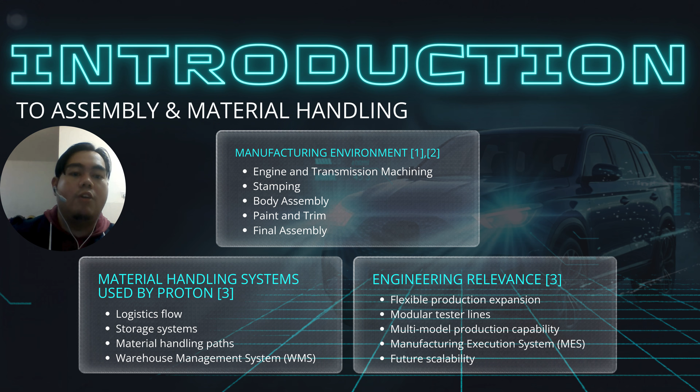Proton Tanjung Malim plant represents the physical automation environment of our case study. The facility consists of several manufacturing stages, including engine and transmission machining, stamping, body assembly, paint and trim, and final assembly. To support this operation, the plant incorporates optimized logistic flow, storage system, and material handling paths. The facility is also designed for scalable and flexible production through modular manufacturing lines and digital systems such as MES and WMS, making it a suitable example of a modern automotive manufacturing environment.

This slide explains the engineering fundamentals that enable automation in Proton's manufacturing environment. First, physical motion is generated by actuators such as electric motors, servo drives, and robotic mechanisms, which are used to move vehicle bodies, components, and production equipment. To control this movement, sensors are used to detect conditions such as position, presence, speed, or distance.

The sensor data is then sent to a controller which processes the information and determines the appropriate action based on predefined control logic. For example, when a vehicle body reaches a workstation, a sensor detects its position and sends a signal to a controller. The controller then stops the conveyor and allows the next assembly operation to begin.

Finally, a feedback loop ensures that the system operates accurately and reliably. The controller continuously compares the actual system condition with the desired condition and makes correction when necessary. This principle of motion control, sensing, control logic, and feedback forms the foundation of automated assembly and material handling systems used in modern automotive manufacturing.

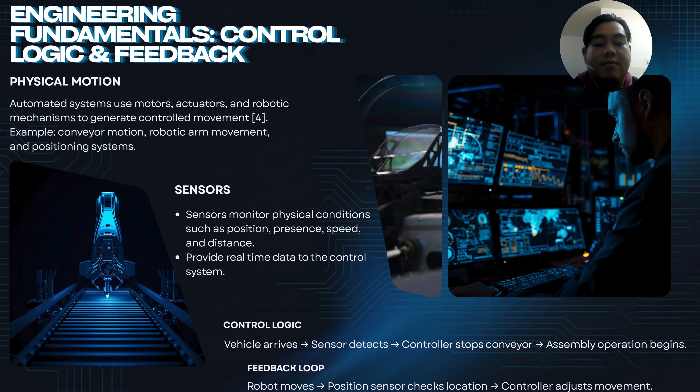This case study focuses on Proton Tanjung Malim manufacturing facility and its use of CIM integration to support automotive production. The engineering challenge extends beyond simply manufacturing vehicles. Proton must simultaneously improve production efficiency, maintain product quality, optimize material flow, enhance worker safety, and support sustainable manufacturing practice. These objectives often create conflicting requirements such as increasing production speed while maintaining safety and sustainability standards. Because the problem involves multiple constraints, stakeholders, and possible solutions, it qualifies as a broadly defined engineering problem.

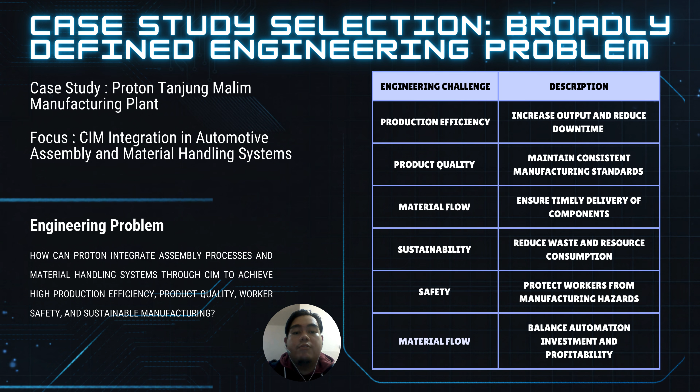The assembly process in Proton's manufacturing system follows a structured sequence beginning with body assembly, followed by painting, trim installation, and final assembly. From an automation perspective, the process relies on sequential operation where each stage must be completed before the next stage can begin.

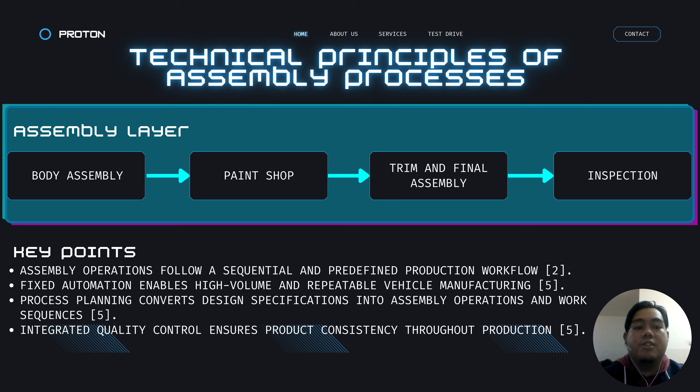The manufacturing workflow is supported by a process planning system that translates product design into detailed assembly procedures. In addition, quality control activities are integrated throughout production to ensure consistency and reliability. This automation principle enables efficient, repeatable, and high-volume vehicle manufacturing.

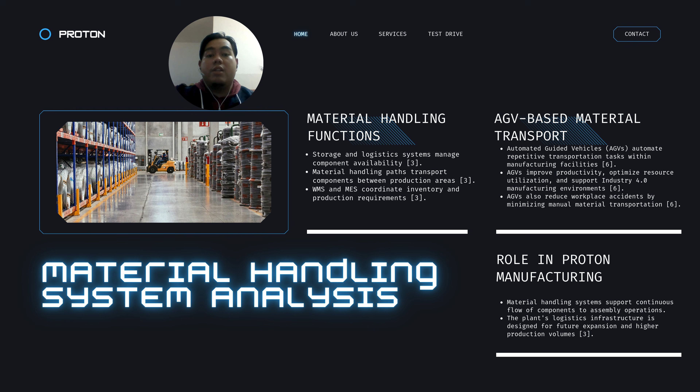The material handling subsystem ensures that components are delivered to the correct production area at the correct time. At Proton Tanjung Malim facility, logistic flow, storage system, and material handling paths support the movement of material throughout the factory. Modern manufacturing facilities increasingly use automated guided vehicles, or AGVs, to automate repetitive transportation tasks. AGVs improve productivity, optimize resource utilization, and reduce workplace accidents while supporting Industry 4.0 manufacturing strategies. Together with systems such as WMS and MES, the material handling subsystem enables efficient and scalable production operation.

Assembly and material handling systems perform different but complementary functions within Proton's manufacturing environment. The assembly subsystem is responsible for transforming components into finished vehicles through processes such as body assembly, painting, and final assembly. Its primary focus is product creation, quality, and process execution.

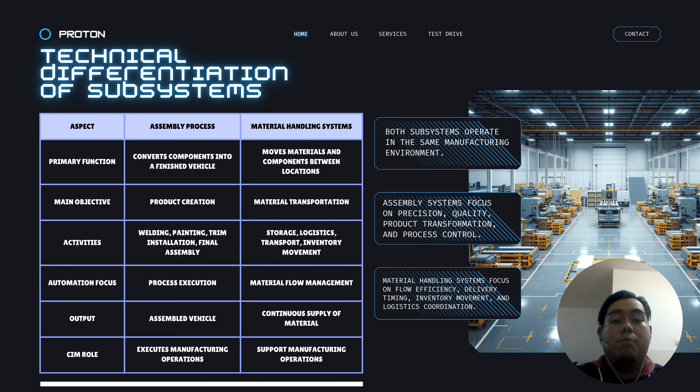In contrast, the material handling subsystem focuses on moving and supplying components throughout the factory. It manages storage, logistic flow, and transportation activities to ensure that material arrives at the correct workstation when required. Therefore, while assembly systems create value by manufacturing the product, material handling systems create value by maintaining continuous production flow. Both subsystems must operate together to achieve efficient and reliable automotive manufacturing.

System efficiency in Proton's manufacturing environment depends on the effective integration of assembly and material handling systems. Through CIM integration, manufacturing execution systems and warehouse management systems coordinate production activities, material availability, and logistic flow in real time. Several bottlenecks can affect manufacturing performance, including material delivery delays, equipment failures, quality defects, and inventory inefficiency.

This challenge can be addressed through CIM-enabled technology such as predictive maintenance, automated quality inspection, AI-powered supply chain management, and optimized logistics systems. At Proton Tanjung Malim facility, modular production lines, logistic infrastructure, and digital management systems support scalable production while maintaining operational efficiency. By reducing downtime, minimizing defects, and improving material utilization, CIM integration enhances productivity and supports sustainable automotive manufacturing.

Today I'll be presenting on how Proton integrates CIM into its automotive assembly plant for sustainable production. CIM is a system that connects all manufacturing processes from design and planning to purchasing and distribution using computer technology. It links CAD and CAM with production systems, enables data-driven decisions, and connects platforms like MES, WMS, and ERP.

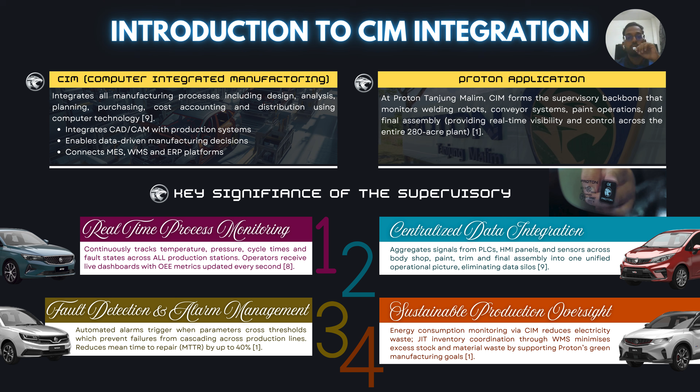At Proton Tanjung Malim plant, CIM acts as a supervisory backbone across the entire 280-acre facility. It does four key things: it monitors all production stations in real time, it centralizes data from sensors and PLC panels across every zone, it triggers automated alarms before failures cascade, and it supports green manufacturing by tracking energy use and coordinating just-in-time inventory.

Moving on to how CIM is structured at Proton, it follows the ISA 95 control hierarchy across four levels. Level 1, over 500 sensors and 300 welding robots collect physical data. Level 2, Siemens S7 PLCs control robot cells, conveyors, and safety systems.

Level 3 is the supervisory CIM layer. This is where the MES tracks every vehicle body in real time and dispatches the correct program to each station automatically. Level 4, SAP ERP manages the supply chain, while WMS coordinates just-in-time delivery and carbon emission tracking.

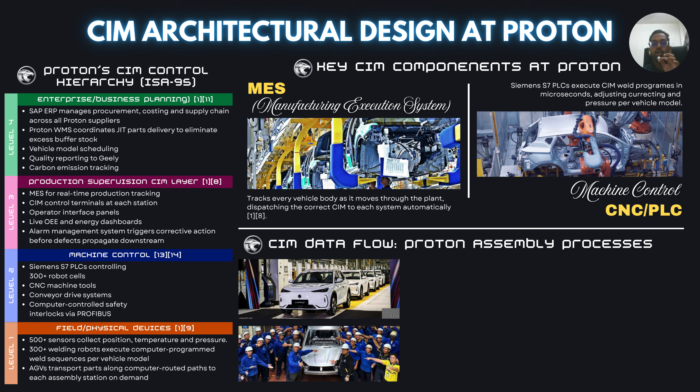The data flow is seamless from body welding capturing weld current and force, to paint ovens monitoring temperature, to end of line vision scans determining whether a vehicle is released or sent for rework.

Finally, let's look at the real impact CIM has on Proton's operation. CIM enables three major improvements. First, multi-model scheduling. The MES dynamically sequences the X50, X70, and Saga on the same production line with zero manual intervention and zero changeover stoppages.

Second is predictive maintenance. CIM analyzes vibration and temperature data from all 300 robots, scheduling maintenance proactively, resulting in 50% fewer breakdowns.

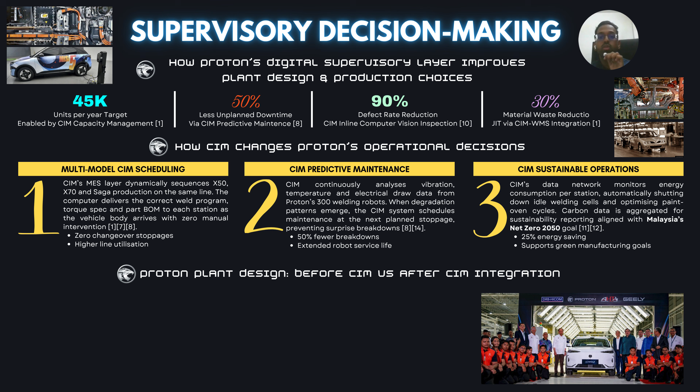And third is sustainable operation. CIM auto shuts idle machines and optimizes paint oven cycles, cutting energy use by 25% and supporting Malaysia's net zero 2050 goal. And in conclusion, CIM is not just an automation tool, it is Proton's foundation for smarter, greener, and more efficient manufacturing.

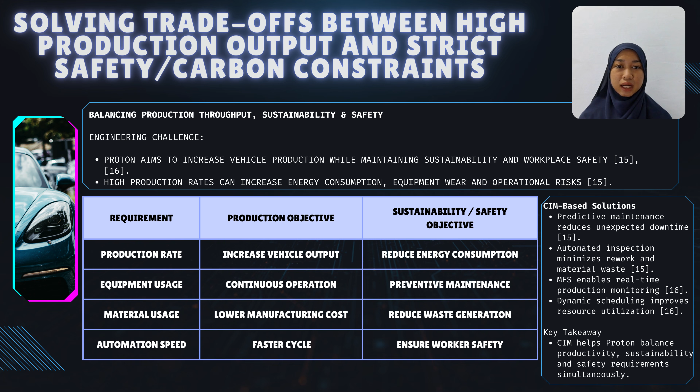To address this challenge, CIM provides several solutions such as predictive maintenance, automated inspection systems, manufacturing execution system or MES, and dynamic scheduling. These technologies help improve productivity while reducing waste and downtime. Overall, CIM enables Proton to achieve higher production output without compromising sustainability and safety objectives.

This slide highlights how CIM contributes to environmental sustainability in Proton's manufacturing operation. Real-time energy monitoring helps reduce unnecessary electricity consumption, while just-in-time inventory management minimizes excess material storage. Predictive maintenance extends equipment lifespan and reduces waste generated from unexpected failures.

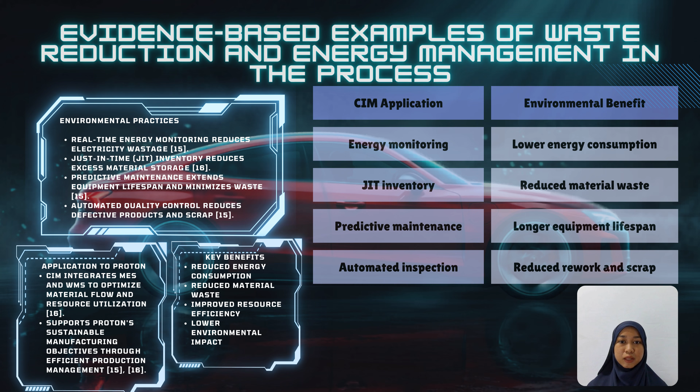In addition, automated quality control reduces defective products and scrap materials. By integrating systems such as MES and warehouse management system, Proton can optimize material flow and resource utilization throughout the production process. As a result, CIM helps reduce energy consumption, lower material waste, improve resource efficiency, and decrease the overall environmental impact of manufacturing activities.

Beside productivity, safety is also a critical aspect of CIM implementation. In automotive assembly plants, several hazards exist, including robotic welding stations, conveyor systems, electrical equipment, and paint operations. These hazards can cause injuries, electric shocks, or chemical exposure if not properly controlled.

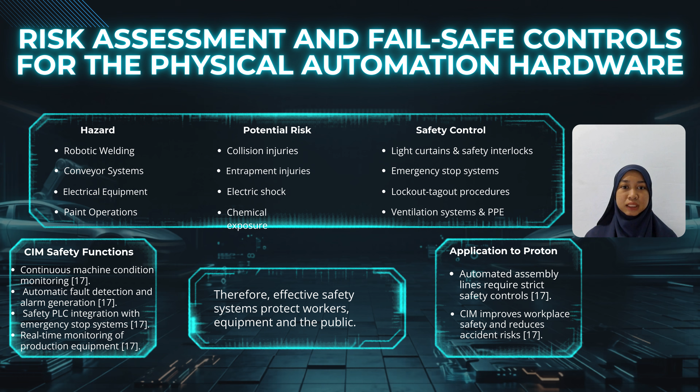CIM incorporates various safety functions such as continuous machine monitoring, automatic fault detection, alarm systems, and safety PLC integration with emergency stop systems. Examples of safety controls include light curtains, safety interlocks, emergency stop buttons, lockout tagout procedures, and proper ventilation systems. Therefore, CIM helps Proton create a safer working environment while reducing operational risk and workplace accidents.

For a CIM system to operate effectively, compliance with regulations and professional standards is essential. In Malaysia, relevant regulations include OSHA 1994, the Environmental Quality Act 1974, and the Factories and Machinery Act 1967. These regulations focus on worker safety, environmental protection, and equipment certification.

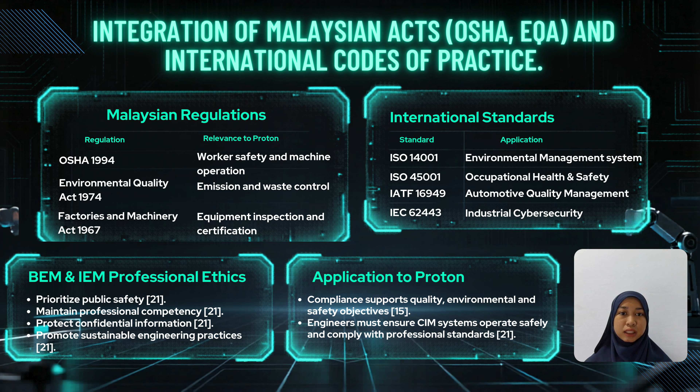At the international level, standards such as ISO 14001, ISO 45001, IATF 16949, and IEC 62443 provide guidelines for environmental management, occupational safety, quality management, and industrial cyber security. Engineers must also follow BEM and IEM professional ethics by prioritizing public safety, maintaining professional competency, protecting confidential information, and promoting sustainable engineering practice. Compliance with these requirements helps Proton maintain safe, reliable, and sustainable manufacturing operations.

This slide discusses future technologies that can further enhance CIM implementation. Technologies such as industrial Internet of Things, artificial intelligence, digital twin, collaborative robots, and additive manufacturing are expected to transform automotive manufacturing. For Proton, these technologies can improve predictive maintenance, support electric vehicle production, enhance quality control, and increase manufacturing flexibility. On a global scale, this innovation can reduce carbon emissions, strengthen supply chain resilience, improve competitiveness, and accelerate Industry 4.0 adoption.

In conclusion, future CIM technologies will continue to improve productivity, sustainability, and competitiveness in the automotive industry while supporting Proton's long-term manufacturing goals.

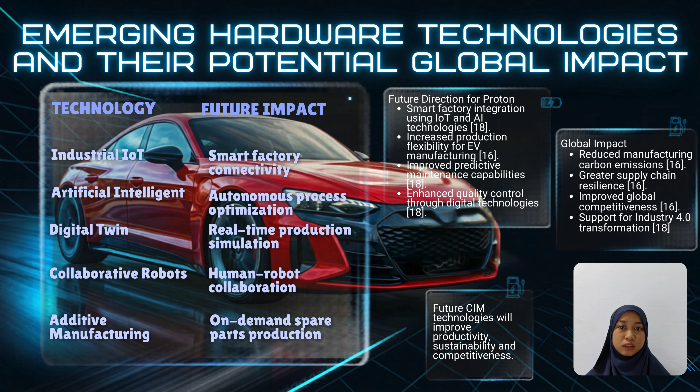In this slide, we will discuss the ethical issues related to cyber security and data privacy in Proton's CIM environment. As manufacturing systems become more connected through computer, network, and automation technology, they are also exposed to cyber security risks, which means unauthorized users may gain access to the manufacturing system, and cyber attacks may disrupt production operations.

Confidential company information could also be stolen or misused. Another important issue is data privacy. Modern CIM systems store large amounts of information, including employee records, production data, and company information. If this data is not properly protected, it may be exposed to unauthorized parties and affect stakeholder trust.

As engineers, we have a professional responsibility to protect confidential information, ensure the security of digital technology, and report cybersecurity risks when they occur. We must also promote ethical behavior and accountability within the organization.

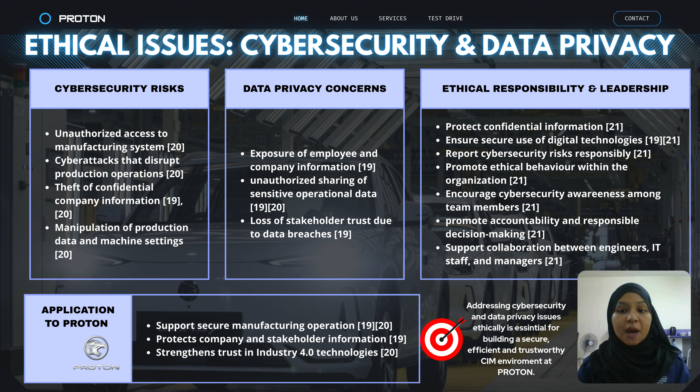In addition, cybersecurity requires teamwork, which means engineers, IT specialists, and managers must work together to create a safe and secure manufacturing environment. For Proton, addressing cybersecurity and data privacy issues is important to support secure manufacturing operations, protect stakeholder information, and strengthen trust in Industry 4.0 technology.

Next, for BEM and IEM Engineering Ethics. This slide will explain how the ethical principles of the Board of Engineers Malaysia, BEM, and the Institution of Engineers Malaysia, IEM, can be applied in Proton's CIM environment.

The first principle is public safety and welfare, which means engineers must ensure that CIM machines, robots, and automated systems operate safely to protect workers and the public. Safety should always be the highest priority in engineering activity.

The second principle is integrity and honesty. Engineers must provide accurate information, report issues truthfully, and make decisions based on facts and professional judgment rather than personal interest. Another important principle is confidentiality and data protection, since the CIM system handles production data and company information.

Engineers should protect this information and prevent unauthorized access or data breaches. Engineers must also maintain professional competence, working within their area of expertise and continuously improving their technical knowledge, especially in CIM and Industry 4.0 technology.

In addition, engineers should support sustainability by promoting energy efficiency, reducing waste, and contributing to environmentally responsible manufacturing practices. Finally, professional conduct and leadership are essential, meaning engineers should demonstrate respect, fairness, accountability, and lead by example while promoting ethical behavior within the organization.

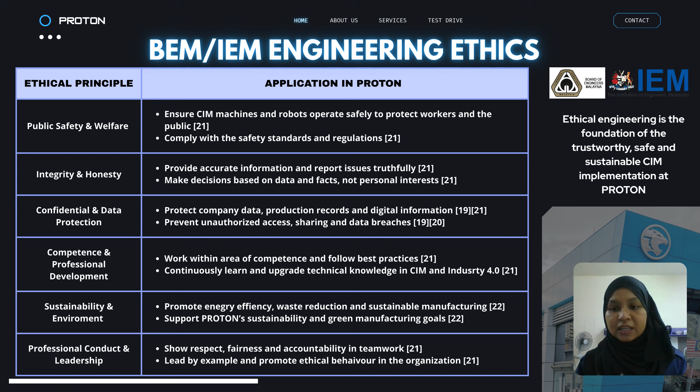By following the ethical principles established by BEM and IEM, Proton can maintain safe, reliable, and sustainable manufacturing operations while strengthening trust in its Industry 4.0 initiatives.

We maintained effective communication through regular group discussions, information sharing, and collaborative problem solving. This helped us coordinate our work, solve challenges efficiently, and ensure that all tasks were completed on time.

We also discussed our problems in our group WhatsApp. Professional ethics were also important throughout the project, meaning we respected each other's opinions, maintained accountability for our responsibilities, and supported one another whenever difficulties arose.

As future engineers, leadership is not only about leading a team but also about promoting cooperation, responsibility, and ethical decision making. Overall, effective leadership, communication, and teamwork enabled our group to successfully analyze CIM integration in Proton's automotive manufacturing environment while maintaining professional and ethical working practices.